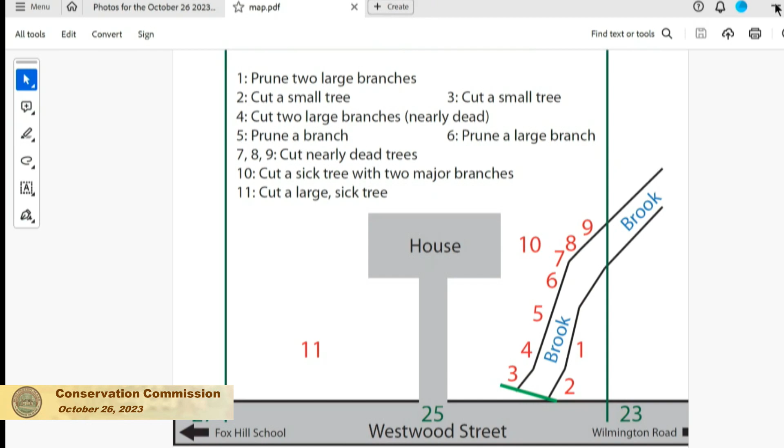Okay, that sounds very good. So we will have a determination that we can read. I think, just to let you know, we can talk about it with the determination, but I think he would like some feedback generally about the replacements, what they would be and where they could go. So let me find the determination.

I have another question also. Just with the wording of the document here, it says 5 tree removals, but we've talked about at most quibbling over 2. So 11 minus 2 is 9. So I'm just wondering why it says 5 tree removals in the document. Well, then we can fix that. I probably just got it wrong.

Oh sorry, where'd it go? Draft decisions, Westwood trees. Let's fix it right now, in fact. And I'll have to reshare again.

So there's 11 trees altogether, but they're not all being removed, some of them are being pruned. Well, that was why, maybe that's probably the requested discrepancy - remove 7. Okay, and that was it. And now you're basically approving 5 with 2 potentially extras, also pruned. Yeah, that was all consistent.

Okay, so let me make it a little bigger. And some of these things were highlighted because we knew we were going to have this discussion. The applicant proposed to cut 7 trees and prune large branches of 4 additional trees at 25 Westwood within the riverfront area. Sorry, that doesn't need to be highlighted anymore. We can talk about the rest in a minute.

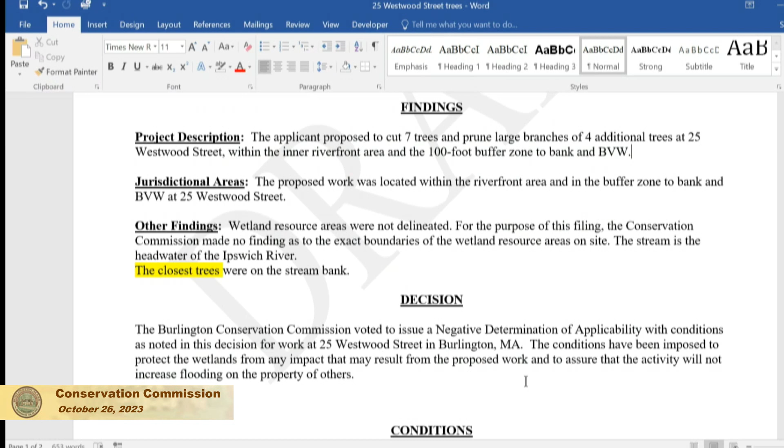This is saying that this decision is only for the work described here, and no other work is reviewed and permitted. The applicants may proceed with 5 tree removals, so I think that's now correct because you prefer trim.

Removal of any other trees would require additional approval from the Commission or Administrator and may require submission of a written assessment by an arborist that they pose a hazard or are in decline.

For trimming or removals that are not feasible to do by hand, machinery should be located in the driveway or lawn areas. Prior to cutting, the trees shall be marked with ribbon and inspected by the Conservation Commission staff along with the tree company representatives.

I think that's mainly so we're clear that we're all on the same page about which trees are going. The stumps of trees shall not be removed without selective approval from the Commission or Administrator.

The applicant is encouraged to leave snags where feasible for wildlife habitat and to leave part of the cut trees in the wetland. 5 native trees to be selected in consultation with Conservation Department staff shall be planted within 10 feet of the stream bank.

So I guess when John or somebody is out looking at those trees, you can chat about what the species might be. Debris or lawn clippings shall not be dumped in the wetlands or stream. Pesticides, herbicides, and fungicides should not be used within the wetlands or within 100 feet of wetlands or stream.

And we have permission to just come out and check on the proceedings while the tree cutting is happening.

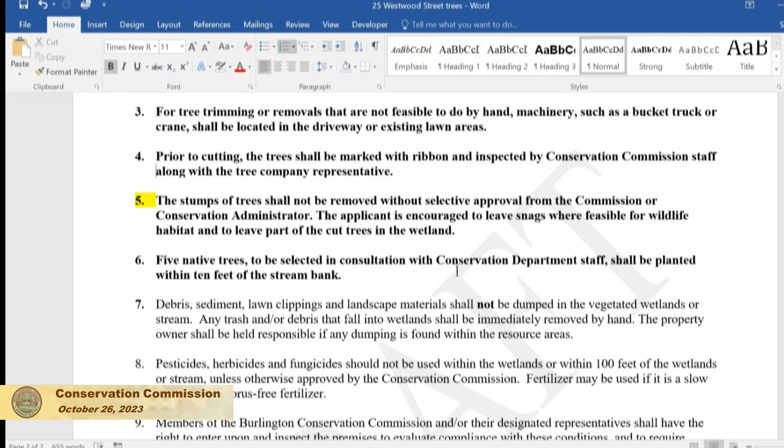It will be helpful if you can tie a ribbon around the particular trees you're talking about, so we can confirm which ones they are with the tree company. Or you can just have them marked - when the tree company comes, they can spray paint them instead of tying ribbons.

Clarifying: not the ones to be pruned, but the ones getting taken out should be marked differently. The tree company should be able to spray paint those. You could mark the ones getting pruned, but the ones getting cut down, have them spray paint instead.

Okay, no other comments? All right, can I have a motion to approve the determination of applicability for 25 Westwood Street? So moved. All in favor?

You are all set, sir. Thank you very much. Thank you. Great night. Thank you.

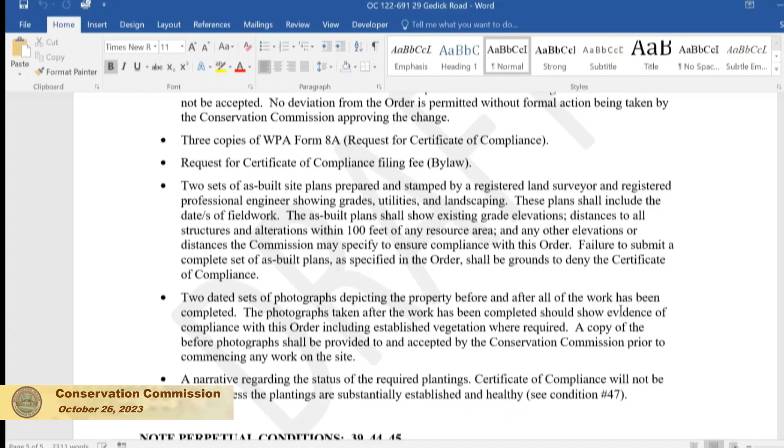Okay. You all set with that, Mr. Hickok? Yes, I just have one comment on the 2 maple trees.

I met John out there. We were pruning those trees. It's just, the 2 maple trees, the big branch leaning on the, but we don't have to put it on that, do we?

I just want to be clear that I'm pruning those 2 trees. I showed John what we were intending to do. Yeah, I remember there was one with a branch sticking straight out towards the house. The other one just had a couple things where I met with the tree guy.

Yeah, we can add it. Yeah, let me just add, sorry, go ahead. Good.

I was just going to say under project description, removal of 5 trees, trimming of 2 maples, and so on.

Just a maintenance thing - it's the first time we've probably been there and we didn't see as much junk around, any dumping or whatnot. The only thing that's there is a bike frame, towards the back on the brook side. Okay, just pull that out. Yeah, sure, we'll get rid of that. We showed John some stuff we wanted to clean up - we're not going to upset the area, but they'll hand clean it, put it into the truck, and get it out of there, make it look good back there. Thank you for that, great.

Any other comments from the commission? Okay, so may I have a motion to close the hearing for the notice of intent at 29 Gedick Road, to demolish existing dwelling, construct a new dwelling, DEP 122691. So moved. Is there a second? Second, Ken. All in favor?

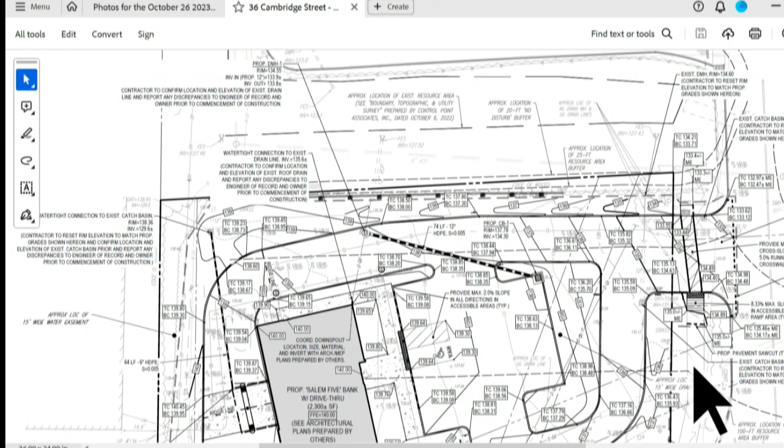The project doesn't propose any work in or proximate to the wetlands, but the site is within the 100-foot buffer zone to that wetland and within the 200-foot riverfront area of Little Brook, which is a perennial stream. The project involves demolition of the existing 1,400-square-foot bank building and the existing parking area of about 19 spaces, and reconstruction of a new 2,300-square-foot bank with 11 parking spaces. The planning board actually has a maximum parking space requirement, so there will be about 8 spaces less than there is today. That reduction allows for quite a bit more pervious area than exists today. If you envision the site, it's essentially the building and paved parking throughout, through the driveway and up to the road, so we're able to pull the edge of pavement along the plan north, or wetland side, of the property in a little bit to add vegetation there, plus some additional interior pervious areas throughout the site. Overall, about a 2,600 square foot reduction in total paved area, or around 10% of the total site area.

In addition to reducing total impervious area, it doesn't extend beyond the existing limit of disturbance or vegetation, and pulls the impervious area in. We are proposing some stormwater improvements, which I'll talk about in more detail because I know staff had questions about that.

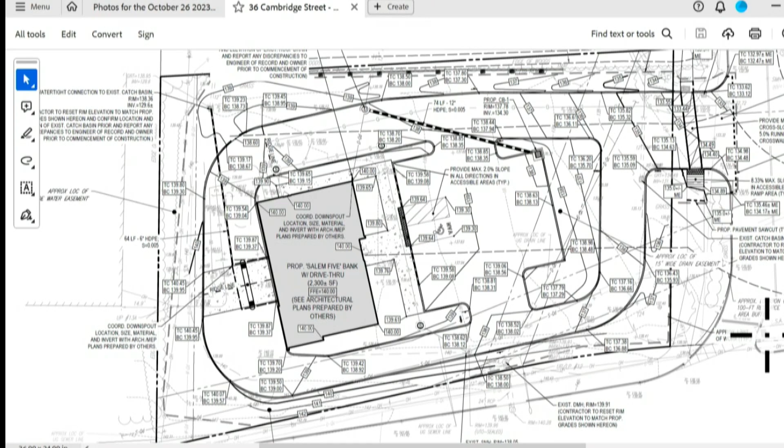Okay, I have a couple of comments. First of all, I think it is going to be an improvement overall - there'll be more green space, and we just talked about improving the drainage and treating it somewhat, that'll be helpful. We were also discussing the green strip along the street, that it would be nice to have something there. We realize you can't put in trees because of the power lines, but some shrubs or flowers. I'm sure the planning board brought that up - I know they were very big on that for the Audi place down the street. They wanted that to be more presentable as people came into town. So I think that's probably what they were discussing with you.

They were not shy about that point, they definitely wanted landscaping along the front. Good, because we would like to see that as well. There could be some space in the back, the green area at the top of the drawing, to put in a tree or two perhaps. Yeah, I'll talk to the landscape folks, see if there's something wetland or riverfront friendly we could put back there, another native tree. And again, the maples that were mentioned were variants, not true natives, so we prefer true natives whenever possible.

I have one other comment. I see there's a gas line going to this building. Why not just heat it with a heat pump, an air source heat pump? You wouldn't need a gas line at all. It's small enough that you should be able to heat and cool it with a heat pump quite easily, I would think, and you'd be carbon-free.

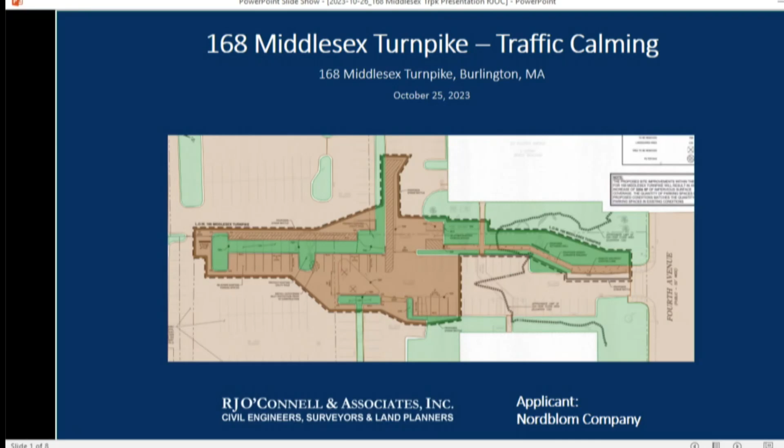As we can go to the next slide, sorry. Do you want me to move on more? Yeah, I can go. This is general overview. This gets a little bit closer. You can go to the next one. Yep.

We're calling the project traffic calming because of essentially the 4 islands you see inside that red rectangle. It's the main area of concern. Cars regularly converge on that one location from 5 different directions, and we've had multiple complaints from tenants in the park asking us to make the area safer for their employees.

This will become even more of a safety hazard, as I'm sure we'll see a lot more foot traffic coming through here for surrounding office buildings as employees return to the office more. They're also walking up to 3rd Ave Retail Shopping, directly to the left of this screenshot, and the new pickleball courts.

Also, moving forward, this will affect more Burlington residents as the Lifetime Living residential building is directly to the right of this screenshot, with 130 apartment units. This route right through the parking lot is the shortest distance to the 3rd Ave Retail Shopping Center, so whether or not we make the safety improvements, people are still going to be walking through there.

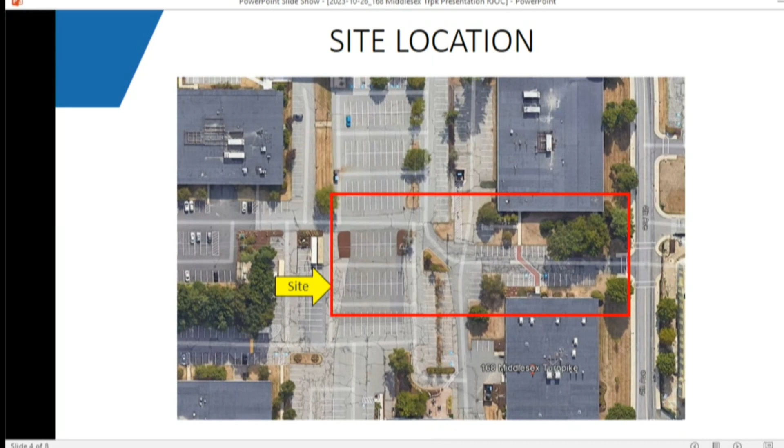So with that, I'll turn it over to Brian and Drew, and they can give you some more specifics on the plan that we came up with. Sure, Eileen, if you wouldn't mind going to the next slide. Do you want me to zoom that in, or are you good with that? Could you actually zoom it in a little bit?

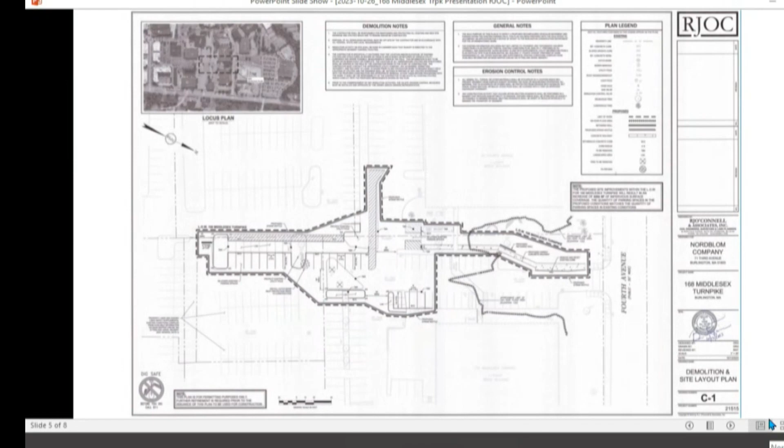From a broad standpoint, we're in front of you all because of the bordering land subject to flooding, which is the jagged line on the right and the area to the right of that line. We are proposing a 5-foot concrete walkway from 4th Ave up towards our project space. There is an existing sidewalk on 4th Ave, so it will connect into that.

That is why we are in front of you all for the notice of intent. To create that walkway, we will be putting in a small wall and regrading, which will affect the flood storage. To account for that, we're going to grade a little bit to provide more flood storage than what is currently there, by 60 cubic feet, but that's probably too precise.

Within the space on the left, we're going to adjust some of the landscape islands to straighten it out, and the drive lane from 4th Ave going up will be very straight with concise intersections, which is much more improved over what is currently out there.

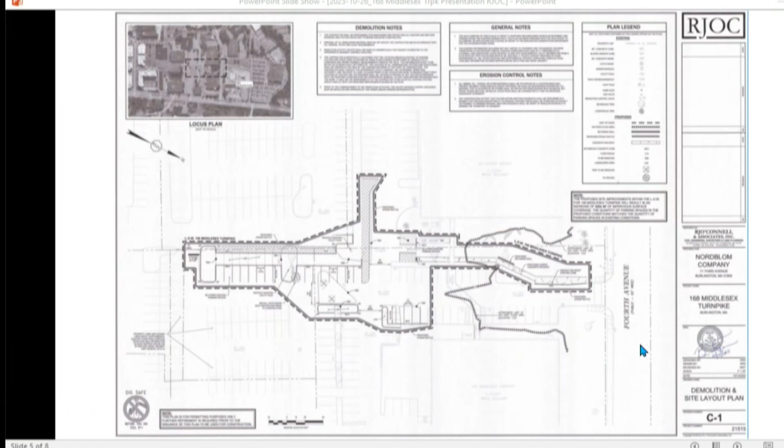That one? Yeah, that one. So that shows the new landscape islands, and what is brown is the impervious area. It's much straighter than it is currently out there. Right now, there are basically 3 landscape islands.

Can you move it a little closer to the microphone, please? I'm having trouble hearing you. I'll move the microphone closer to you. Yeah, good, sure. Could you jump to the next slide, please?

Yep, so this is our grading and drainage plan. We are increasing the impervious area by 320 square feet. There's such a large area going to this drainage system right now, which is just catch basins going to the main drainage system. We're going to improve it by adding 2 deep sump catch basins, which will reduce the volume going to each catch basin and provide more treatment with the sumps than what is currently out there.

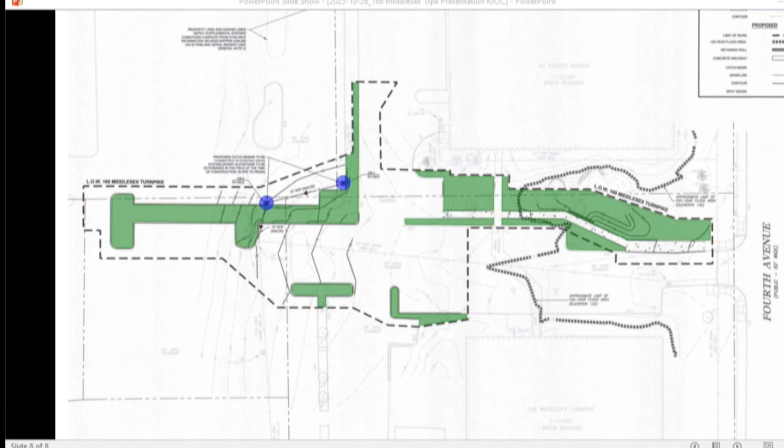And then we'll do some minor regrading in the new roadway, which will create a smooth drive from 4th Ave all the way up. That is basically it. You could go back to the previous slide, which gives a better color view. You want me to leave it on that one for now, while they discuss?

Okay, thank you. Eileen or John? So this is before you because it's in bordering land subject to flooding. It's not in any other resource area. It's beyond the riverfront area.

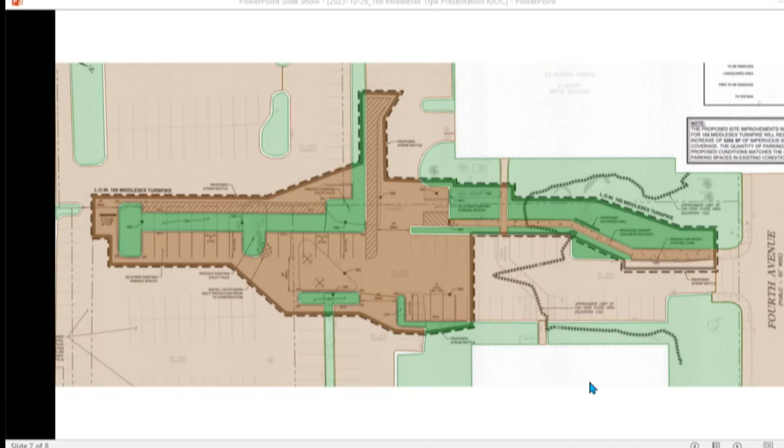There's rivers across Middlesex Turnpike, but it's not in riverfront. So in bordering land subject to flooding, basically, if you're altering the grade, you have to do compensation at each elevation. So a portion of this site, just the section closest to 4th Avenue, is in the 100-year floodplain.

I must have missed, I'll admit I didn't see all these plans, but I couldn't find a table that showed the filling at each elevation and what the compensation is. So we need to know how many cubic feet at each 1-foot increment, or maybe even half-foot, since it's a fairly small area. What you're filling and what you're compensating.

And that's basically it. I mean, the increase in impervious area is fairly minor. This site has a robust underground infiltration system, and it also has a rain garden up near Middlesex Turnpike, which was designed by some famous landscape architect. It's pretty fancy, so the stormwater is going to be fine. We just need to make sure that it meets the performance standards for filling and cutting.

I will note that this section of floodplain, there are new floodplain maps which will probably become effective in 2025, and I can actually share that. You want me to stop? Yeah. Let's see.

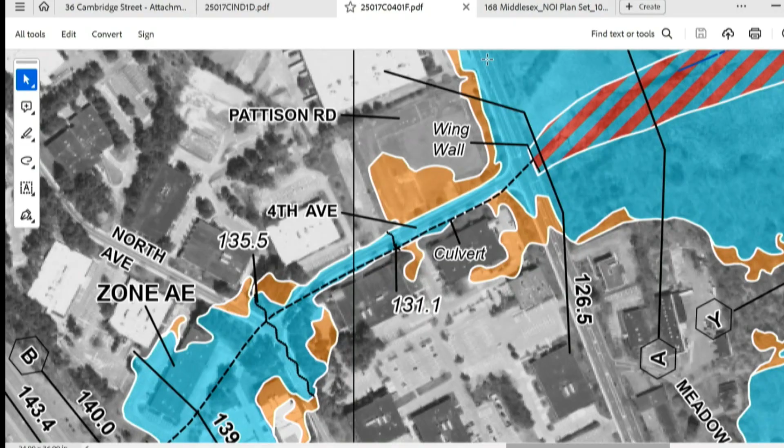And what exactly is filling taking place here? Is that a concern? It's just to build up some of the concrete walkway. Currently, the grade slopes, so we're building out the walkway a little bit, and we have to fill it. So it's not as steep? Yeah, we have to fill it and then put a wall to protect a tree. Otherwise, we would grade off slowly at a 3-to-1 slope, but we need a wall to protect the tree, so elsewhere, we'll have a cut to provide the storage.

All right. And I would note, this does not have a DEP file number yet either. Okay, let's go to the commission. Any comments? Kent? Nothing to add. Rob?

Nothing major. I did see, right in between the two buildings, right by 23 4th Ave, there's like a depression in there. Topographically, it drops down quite a bit. I don't know if there's, I thought maybe they could have some new plantings or something in there. It might be like topographically, there's a low point right here, like this is where the street is.

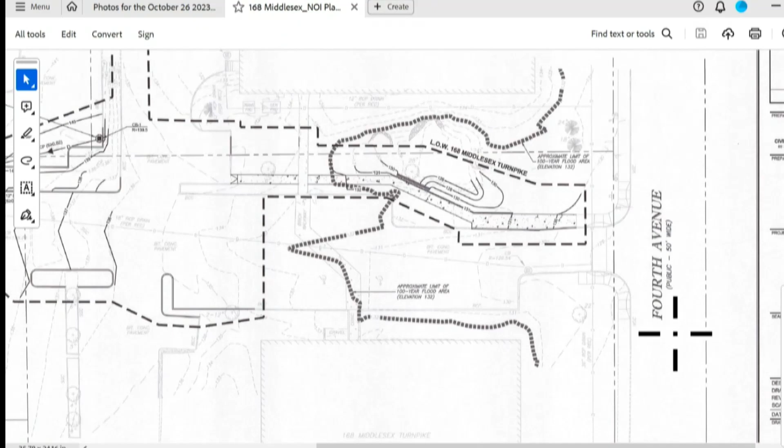And you're suggesting that they do what? That they do some plantings in there? Where are you saying, here, so that they can notice that? Yeah, on that one, be like in here, way in the upper right of the property. In the upper right, sort of. Of the flood zone area, the upper right. Yeah, in front of 23 4th Ave. Further to the right, sort of behind the proposed retaining wall.

It looks like it just drops down a little bit. So if there's any—I think there was something labeled like mulch and stuff on the map, but I'm not sure if there's any additional little landscaping improvements or something. But yeah, it's...

We haven't looked in the flood area, but we are planning on providing some plantings in the large landscape area to the left side. On the top left island, there's a pretty good area to provide a lot of plantings.

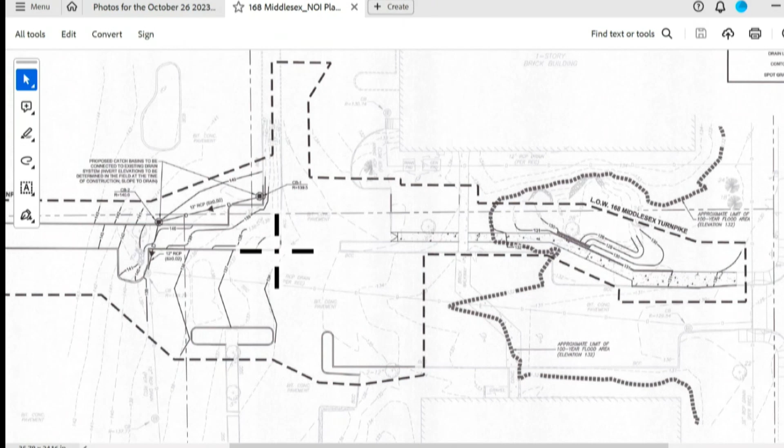Where are we talking about? Like over here? No, yeah, in the parking lot, left side, almost left center of the screen. Yep, in there. There? Right. But we haven't looked in the flood area. We can investigate that.

Was there a planting plan? I don't remember, was it part of this? Not yet. Okay, it would be helpful to see one. Yeah, a planting plan as well.

Sarah: I don't have anything to add. Ed: I'm just curious, John, you kind of let them know that there'll be a change in the floodplain. Is that just something you may want to consider, but not enforce, because it's not here yet?

Trying to figure out how you rule that. Do you expect them to get ahead of the game? No, in this case it's to their benefit that in the future it's not going to be the floodplain. I'm really more concerned about people who are not in the floodplain now, who are going to be. It's a federal map and a federal program, but we're the ones who are going to be taking the calls about it.

And we can't mandate that they meet the 2025 standards today. No, we can just strongly recommend it. Right. I have nothing, but okay.

I just had one other question, because I like to dig into stuff. Looking at the drainage calculations, you mentioned that there is an increase in impervious area, and yet the pre and post runoffs are exactly the same. How does that happen? It's such a large area directed to the existing drainage system.

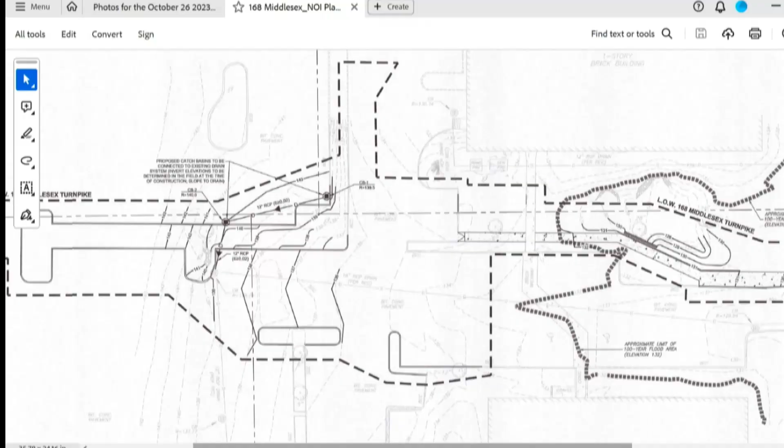Basically, the entire parking area on the left side is all a giant hill that gets directed into, I think, 4 or 5 catch basins. The threshold might be, say, 1,000 square feet that would cause an increase from existing to proposed, but we're underneath whatever that threshold is. So, I don't know, you seem like you want to say something.

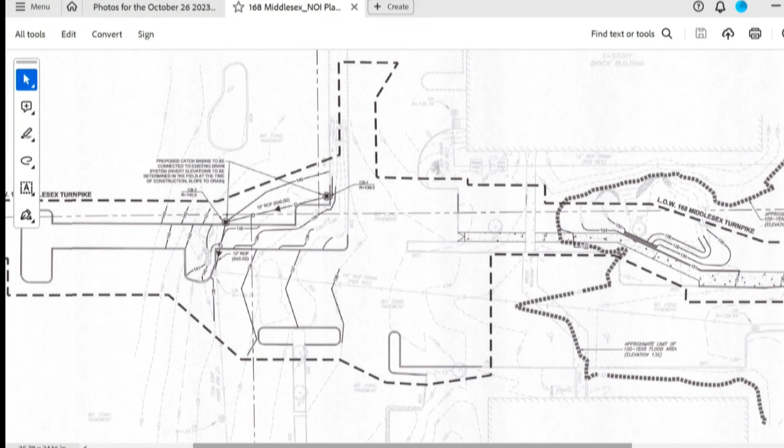I can add a little bit to that. Drew's doing a very good job trying to explain this, so I understand exactly where you're coming from. It's intuitive - when you add impervious surface to a site, typically you have an increase in runoff, definitely. When you're looking at a very small site and you add impervious surface, that increase is going to be observed. On a site this large, with a big parking area, adding literally what, 300 square feet of impervious surface - essentially one parking space - that's almost negligible. When you run a hydrologic analysis in HydroCAD, the curve number, the composite curve number, does not increase.

So we don't get a runoff increase in rate or volume, and we publish in CFS, cubic feet per second, not acre feet or any type of rounding error like that. So it's negligible in this case - it would be lost in the decimal places. It's so small, basically. If you look at a much more finite area, you definitely would see an increase, but this is such a large, expansive parking lot right now. The increase is negligible - the curve number does not move.

Okay, thank you. You're welcome. Anything else we need to cover tonight? This will be continued to the next meeting on November 9th. Is that acceptable? Okay, and can we just be clear on what the commission may be looking for from us?

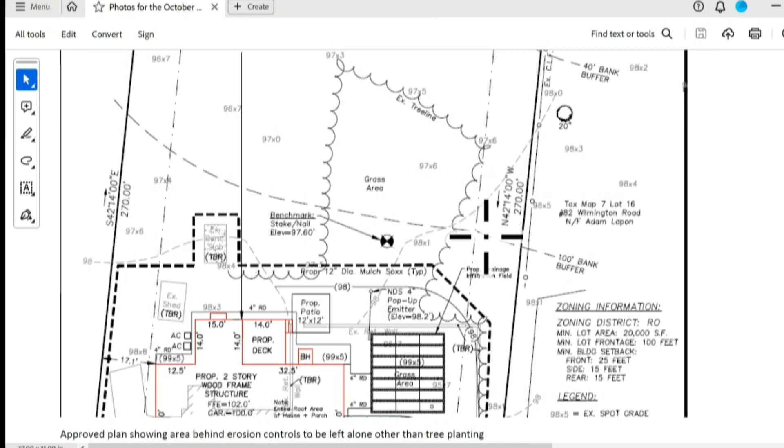It is approximately where the erosion controls were, I'm not sure if it's exactly where they were on this plan. They put their sod down, and it is pretty much exactly where the erosion controls had been, the hay bales. So that is what we knew was going to be the limit of work.

I think if we want to talk about anything tonight, it would just be how she could maybe restore that additional clearing a little bit more. So what we saw for the existing sod was basically what the expected original limit of work was. If you see here, it may not have been the exact limit of work that was on the plan, but it is where the hay bales were.

They may have been a 10 or 15 feet discrepancy between those. Not 100% sure about that, but I'm pretty certain that her new sod is about where that line of hay bales is, so it didn't go further behind there. And these were the trees we had talked about, and I had said she could take down these trees. I didn't realize it was going to be so much clearing. That wasn't the intent, in my eyes, I'm sorry.

No, the left-hand side, that bush covered a lot of area. That's why it looks like we took a lot of things down, but we actually did not. If you see the ground, it's like all weeds there. We actually did take down those 2 trees, and then the whole area is cleaned.

That's why it looks like we took those moss out. That's why it looks like we went super far back behind, but it's not actually.

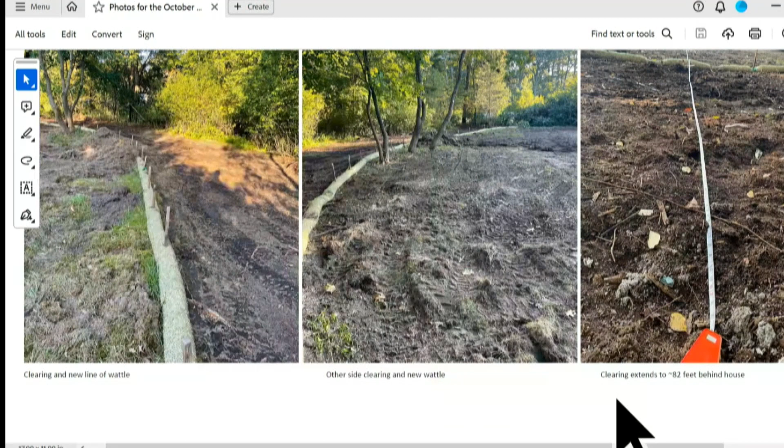If you see, go to the other picture, Eileen. The ones with the trees again? Yeah, this one. Like in the first picture, that area was covered by moss. It's a huge area. Now that we cleaned it, it looks even bigger.

But all this area here was grass, and there was everything under the trees, which I didn't really expect to come out, because we were talking about just clearing to make room for some planting. So I think there was a miscommunication about where we stood.

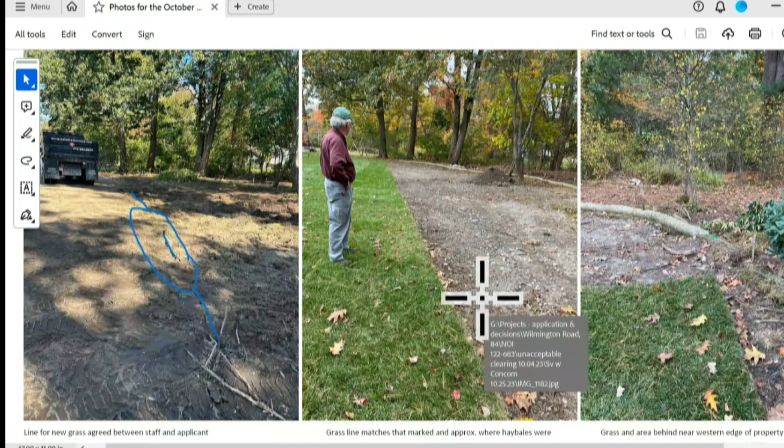So we already planted 13 native bushes and shrubs in that area. That was another reason maybe the landscaper thought, because he was planting those shrubs in the riverfront, so that's why he cleaned it and planted those. After we discussed with him, he said that's why he cleaned it.

My understanding is we had to leave our old house and we were living in a hotel. So we told him to put that line, the wattle, and we told him to plant the trees next to the wattle, behind the wattle. He thought he needed to clean it to plant those trees. So there was a little bit of miscommunication with the landscaper, because I could not watch it all the time.

Because I was a little bit away. I had to give up my old house, living in a hotel, and I'd come in the morning, tell him, and just come in the evening again. If you want, I already planted 13 native shrubs, but there's an area where one side they planted 8, and the other side they planted 5. In between, there could be an area where I can plant 3 or 4 more native shrubs to make it like a...

Well, I think your intent had been to plant some trees where I'm just circling now on the... Yeah, that area we're saving for some fruit trees, not bushes and shrubs. That's the area we thought to start with, like a few fruit trees. And then I love hydrangea, so eventually some hydrangea, some flower plants there in the springtime.

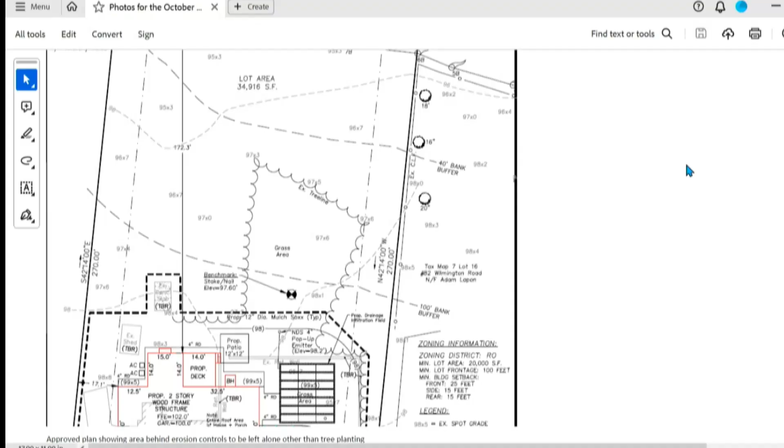We might need a sketch. But I have a question too — when you originally approved this, this area was pretty open grass, remember, and this was all wooded. I think the original plan was to plant more trees there, which is what she was leaving room to do. So are you open to her having a bit more clear area there, or more trees straight across?

I'm not sure — I understand you're talking about moving the wattle further down here. Got it, yes. And then just behind the wattle is where you would start the planting.

Can I make a suggestion? I think we need a plan revision — you need to draft a new plan with the new lines, so the commission can approve it, and there'll be something to actually compare it to when she comes in for a certificate of compliance.

I agree, we need it. But can it just be sketched, or do we need her to do an official one? As long as it's sketched accurately to scale, that's fine.

It would be pretty costly if she had to get a survey done. No, I don't see why it can't just be a sketch — perhaps use one of the existing drawings and then draw in color the changes and the new lines, so we can see where you're envisioning moving the wattle to and changing the shape.

If you want to come over, I can show you there itself instead of engaging the engineer again. Oh no, we're saying let's not engage the engineer — but there should be an agreement. You should take the printout and sketch it up. I can mark approximately where your line is now, and you can sketch out moving it forward or straightening the line, and then what you would propose to put there.

Do you want her to come back to you, or are you okay with her just dealing with staff at that point? She can just come back to the staff. That way we have something we all agree on — right now I think I know what I'm talking about, or you think you know, but it might not be exactly the same. No, that's true.

It's an area of about 30 feet from the grass to the clearing — the total area could be 30 or 25 feet. So I was thinking I'll move in 10, keep 15 feet maybe there, and then leave the other open area as it is. Just leave it there. Okay, that sounds good.

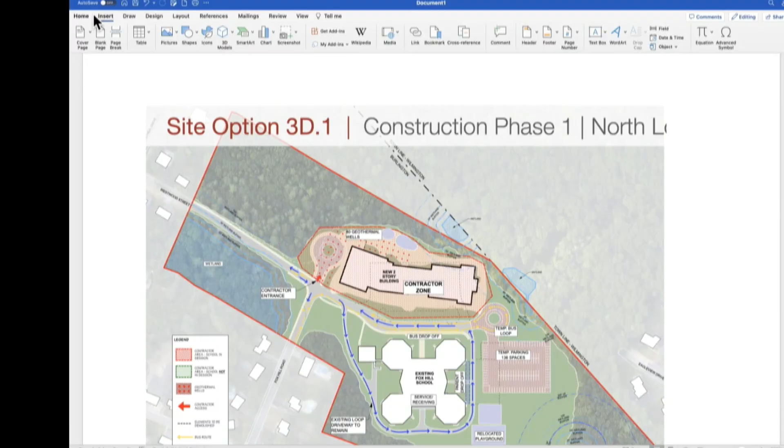Share content. I have a small, short question, on the last page here, the second page, Sarah and I don't show up. Oh, we must have an old page for you, sorry. Should I just sign in? Yeah, just sign it there, put your name next to it. Okay, just make my own one? Yes. Thank you. And then we'll forge all your signatures on a clean one. No, we won't. Thanks for noticing that.

So this is the site. The white here is what's called the snowflake design of the existing school. This is Fox Hill Road, and then Westwood, you enter through here. One of the limiting factors of building a new school is they have to do it on the site without closing the existing school, so they have to work around it, because there's no place to put these kids for 2 or 3 years while you build a new school.

We talked about the delineation of wetlands recently. There's wetlands here, and here, and there's the vernal pool down here, and then this whole area is a wetland here. None of the construction plans in any way will affect this wetland area here, but these other ones are going to be in varying proximity to the wetland resource areas. This is one of the plans, to put it to the north of the existing school.

This will encroach into this whole wooded area here and involve some significant tree cutting if they put it there. There's now a network of trails that has been cut through here for the kids to use, and anyone can use it.

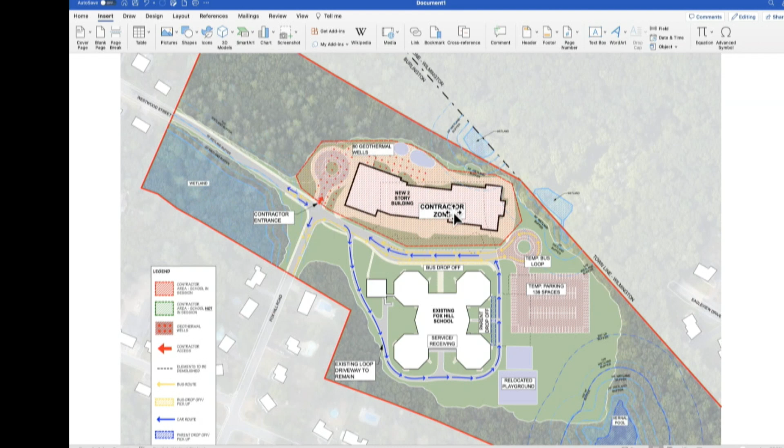This is showing the footprint of the two-story building. If it was a three-story building, it's somewhat smaller, but it would be in the same location. There's four options, this location, two-story or three-story. So that shows you in relation to the things.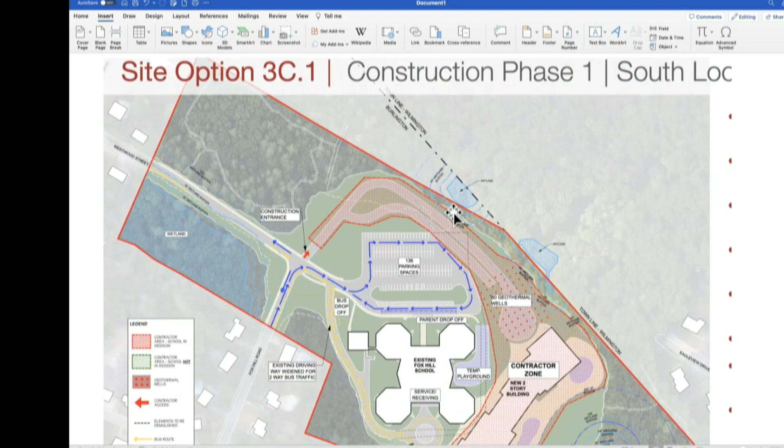One of the things about having it in that location, let me see here, have I got the drawings? So after it's put in, this is what it would look like.

And they had all kinds of discussion about where the buses are going to go, where the parents are going to drop off their kids, and the trash collection. There's so many things to consider in building a new school, it's mind-boggling. Not only that, but the planning of where things go inside the school.

Should the music be near the auditorium? Should the nurse be near the whatever? How much square footage for each study area? I mean, it's crazy.

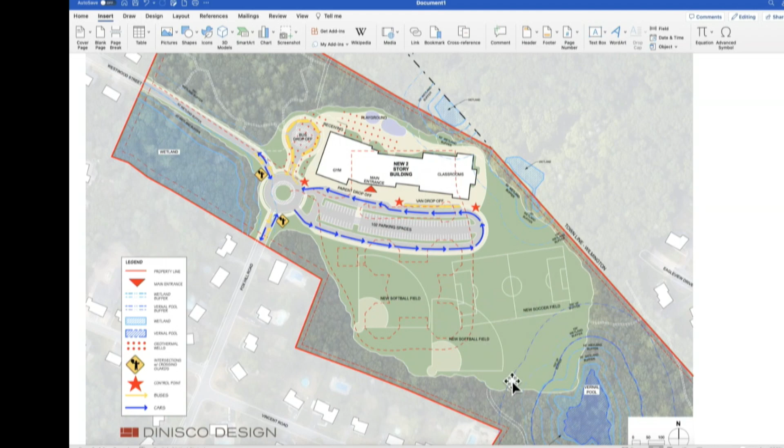But anyway, this plan puts two softball fields and a soccer field right on the 200-foot boundary of the vernal pool. I think it offers too easy an intrusion into the vernal pool area, in that you get soccer balls going in there, your foul balls, home runs, spectators lining up along the sides. To me, that is somewhat more imposing on the wetland area.

The other plan, it's easier to show this because the school is in white, is to put it behind the existing school, sort of parallel to the border of the vernal pool. And that, to me, makes the building an additional buffer to the vernal pool.

There would be a small playground or two in the back, at least in this initial early draft, for first graders to go out and play or whatever. And there's all the geothermal wells would be in this area. There is more groundwater here, but they said that's not difficult to overcome in the planning and the engineering of it.

All of this redness, this is one of the intermediate steps of how you get to the finished product, but this is not what would be the final paved drive area. This is just during construction, but I showed it because the school was easy to see there.

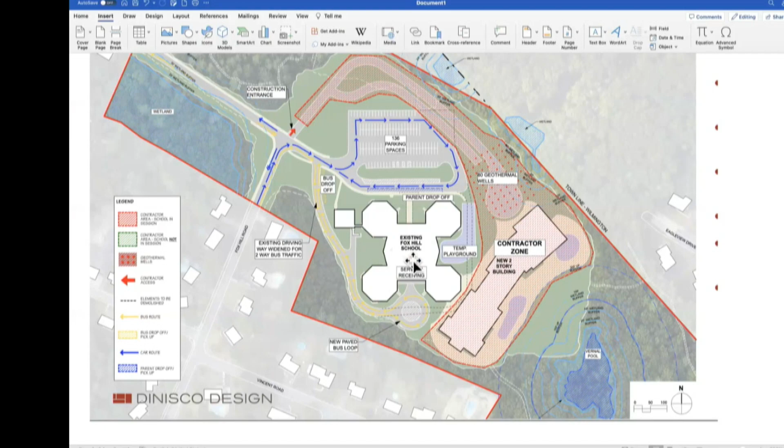So in the final look, this version looks like this. As I said before, I think it offers more of a buffer to the most significant wetland resource area, which is the vernal pool, which may very well be the largest vernal pool in town. John, you think that's a reasonable statement? It's pretty big compared to others in town. And then your ball fields are up here in front of the school.

And there's no cutting at all into this woodland area. But the downside is you've got a lot more paved area to get around to the school and get out with the buses and the parents and the deliveries and all that kind of stuff.

I'm bringing this up for two reasons. One, just to show you what's going on, but the other is, should we take a position on this and make some kind of statement to the school building committee saying we think Plan A is better than Plan B, or just let them go ahead with what they're doing? I spoke up at the meeting and mentioned this two nights ago, but they were like, okay, thank you very much.

It would carry some weight if it was the actual staff or the commission making a statement saying, we think this plan is better than the other plan for the following reasons.

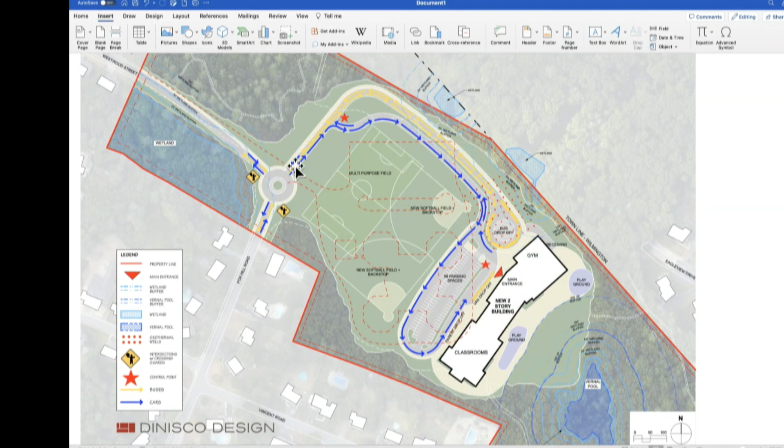Does anyone agree that this seems to be a significant preference? This one having more paved area, but a different geometry.

Do you want to send these out, or have us send them out to the commission? Send us this and we can distribute it and make it an agenda item at the next meeting. Too late? No, it is not. We're two nights before their next meeting, when they're going to approve the site location. Oh, really? I don't know how much we'll be able to, but we can certainly put something in there.

Both plans have the geothermal wells? Yes, that's okay, they're just in different locations.

If you followed along in that meeting, there's a whole bunch of intermediate plans between Phase A of the construction, Phase B of the construction, et cetera, before you get from the initial plan to the final drawing. It's complicated to keep things moving during the whole construction, but they've come up with this Dinisco company that's running all the planning and the engineering and everything - it's terrific, in my opinion.

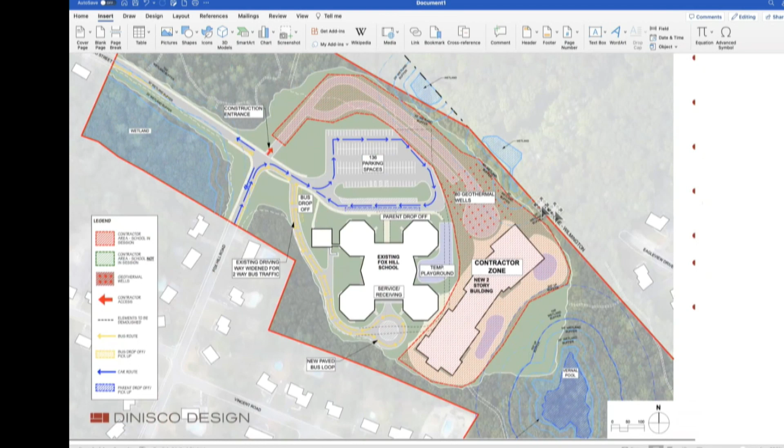First one you showed the existing school with the add-on. The existing school's gone in this one then, is that right? Existing school goes away for both - this is just during construction. Does it go away? Yes. I just showed this because it shows how it's situated behind the existing school during construction.

Gotcha. But once it's finished, I got lost on that. Once it's finished, there's no school there, it's ballpark. And the other one's the same way - there's no school there. Now the ballparks are all down here.

And how many stories are in the new add-on? The new building, they haven't decided that yet. That's also to be decided at the next meeting, two or three. And they've got layouts of all the classrooms and all the facilities.

Has the committee gone to look at places that might be similar to that? Absolutely, they've visited half a dozen of them so far. Different members have gone. I went to look at one, and it was gigantic - I couldn't get over the size of the school. Was that Estabrook by any chance in Lexington? No, but that is a huge school.

But it was a combined school. And as soon as I looked at it, I thought, oh my God, that would be a beast on Fox, in the Fox Hill lot here. So I think that was part of the decision-making process, was when they saw how big the combined schools would be.

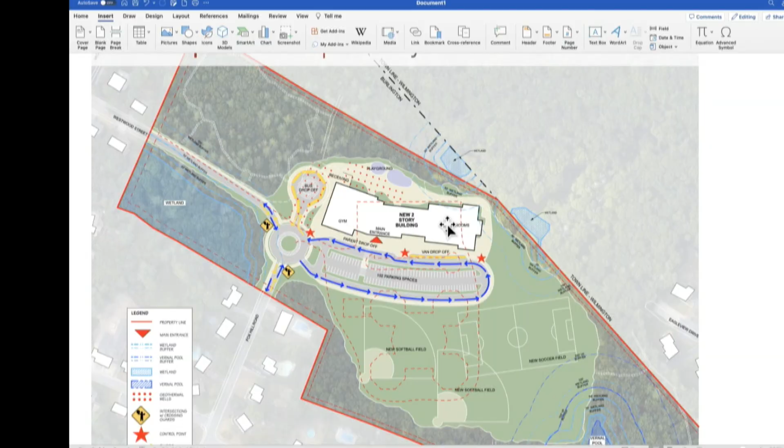There's all kinds of other overlying concerns. The current school holds 420, 440 students. This school's designed for 325, because the state says that's what you're going to have for students in 2028, according to our calculations of fertility rates and movement of people and immigration - you're going to have 325. And everybody's like, how is that possible? We've got 440 now, and I've got kids moving into my neighborhood like crazy.

It's like, Lexington just went from 13% to 17% Asian, just from immigration, and they're all bringing kids with them.

So that's another whole issue, but right now, the state says if you want our money, you play by our rules and our calculations, and we'll fund the school for either 325 students or 630 if you combine them both, which isn't 325 and 325 either. I don't know how they come up with these numbers, but they did - take it or leave it from the state. In addition to the state funding, which would be about 20 to 25% of the cost, the more environmental stuff you do, the more other incentives come along with it.

The state will pay you to put in geothermal, or the state will pay you to add solar and supplement the cost. There's another several million dollars worth of incentives to go with modernizing your heating systems and things like that. They've got all of this calculated in gigantic spreadsheets.

It's crazy. One of their concerns is trying to get this through town meeting, because building this building with geothermal and solar and whatever else is going to cost more than building one that doesn't have that. But over a 50-year lifetime it will save you money. You gotta convince town meeting to spend more now for benefits later. Good luck. I think you're on town meeting. I am one, that too.

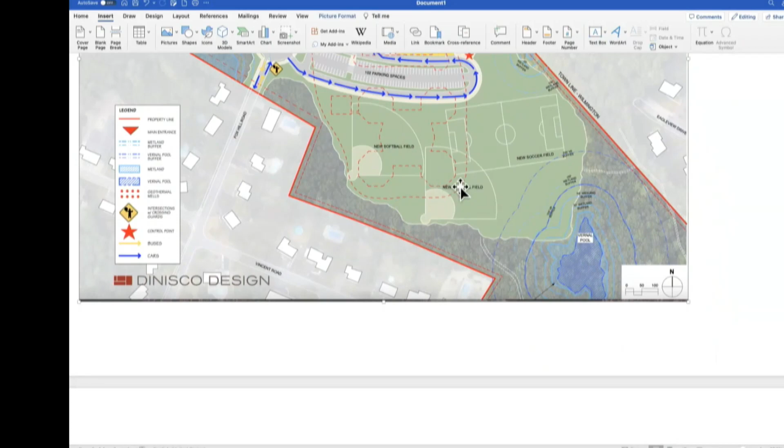So that is the concern, glad they considered that. There's also a few abutters down at the very bottom of the picture - I don't think it's even going to show. Yeah, there's a few houses down at the bottom there. They're quite vocal about what goes on, because right now they've got a significant buffer of woods, and not much happens behind the school, but now they might have 2 softball fields right in their backyard, so they're pretty vocal as well. There's a lot of issues, but we can make our voice heard if we feel there's a strong preference on location of the school to help protect what may be the largest vernal pool that we have.